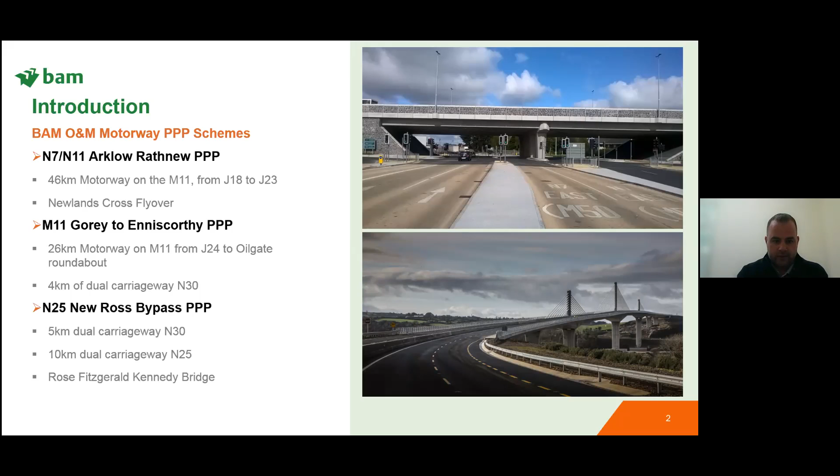In 2020 then we took over the operation and maintenance of the N25 New Ross bypass, which consists of 5 kilometres dual carriageway along the N30, 10 kilometres dual carriageway on the N25, and then in the southern half of that project, with the famous Rose Fitzgerald Kennedy Bridge.

So as I said, we start off with asset management - what that is. So what are assets on a motorway? Assets are every element of the scheme that make up the overall motorway, so that consists of your pavement, your fencing, structures, vehicle restraint systems, landscaping, drainage, road studs, etc.

It's our job to look after those, and we've got those contracts for 25 years.

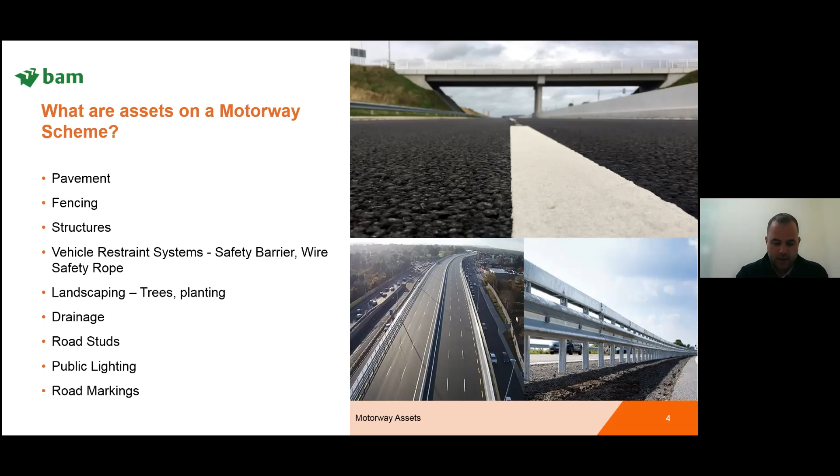And how we look after those systems is how they're managed - a routine maintenance management system, or RMMS for short. This is a system set up online that allows us to put up all the assets for all the schemes there, and they're all recorded. We then carry out our inspections on these assets right the way through, and we create defects on the assets.

As you can see in the photograph here, that's not how a safety barrier should look, so we've got a defect on the asset. And we start to create those, and there's a categorization for each defect. In the instance of this vehicle restraint system, that is an imminent risk to the road user. What you'll hear me use throughout the presentation is the safety of the road user - that's our number 1 priority. So all the assets are managed, looked after and inspected, and defects are created, all with the overall view of making sure that the safety of the road user is looked after at all times.

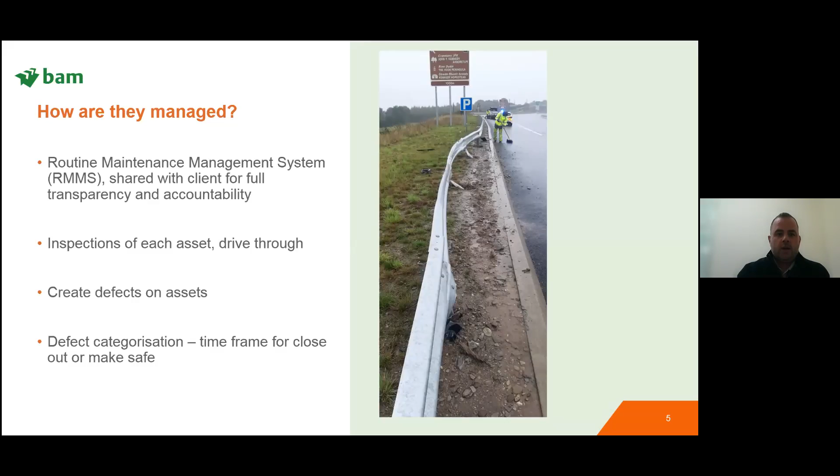So I said to talk about life cycle intervention. I put up there 'make it last', which was something I was told growing up constantly when I got something. So our aim is to make each asset reach its full potential of its design life, so make it last. And I've just written down some average design life for key assets that we found in our experience.

I want to make a point that I'm not contradicting manufacturers, productions or designers. In our experience so far to date of managing our schemes, we look at road signage - you get an average of 10 years before it starts to fade off, starts to reach the end of its design life. SMA pavement in our wearing course, we're looking at about 15 years, of course that's dependent on the environment that it finds itself in.

On the M11, which our works are on, we wouldn't have as high traffic volumes as we would have in the Dublin belt area, the M50 sections. Obviously, they would have to assess how long they get depending on the HGV movements and the traffic flows that they would have.

We've road studs then again, which are the new prism type road studs. You're looking at an average of 15 years before they start to reach the end of their design life. And then you've road markings, which we would look at about 6 years. All these assets are incredibly important to the safety of the road user at all times.

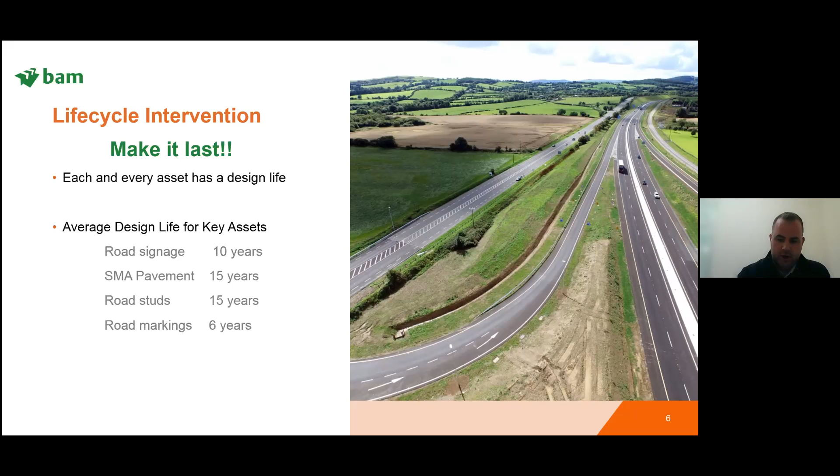PPP projects are programmed for interventions to ensure that we get to the end of the job. So as you can see here in the image, we want to be the pit crew team to keep that car racing all the way through till it gets to the end line. You certainly don't want to be the guys on the right-hand side trying to drag that car across the race line in poor condition.

So as part of that, proactive maintenance is the key. You don't want to be reacting to problems that you're finding out there. You want to be out there ahead of your problems and starting to get through.

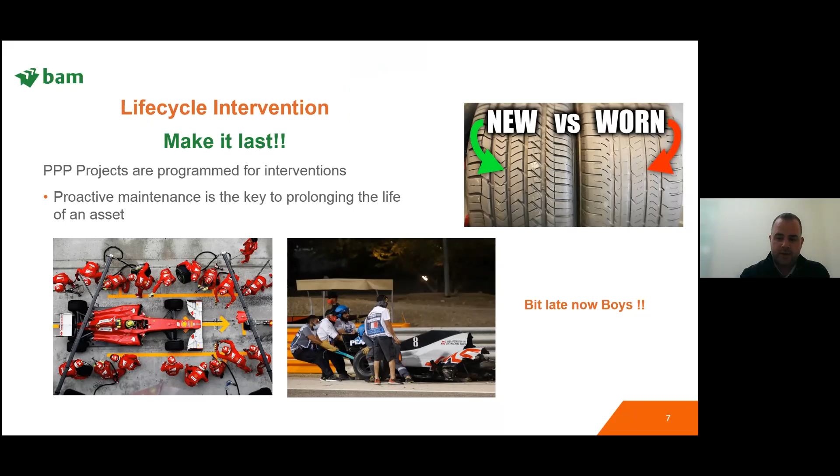So I've thrown up here something that's common to everybody, which is pavement, looking at scrim. Scrim is a very important part of the safety of the road user - it's your skid resistance. That's incredibly important when people are using it, they want to stop. Our skid resistance needs to be at a level that's safe for each road user to use it. As you can see in the graph in the top right-hand corner of the screen,

you start off on the left-hand side, you have excellent, good, fair, poor, and very poor over the timeline. And then you've got your failure from 0 to 100%. So over time, your pavement starts to drop off.

As you can see on the right-hand side, it's excellent, you're doing nothing - you're just carrying out cyclical maintenance. As it starts to drop off, you get into maintain, which is good to fair. As you can see on the table, you're looking at reactive maintenance, typically joint sealing, pothole repairs as such.

And then as it starts to get worse, you're looking at fair to poor rehabilitation. That can consist of, if your skid resistance is low, shot blasting to improve or extend the life, and delay the replacement works.

Also very important is any cracks along your pavement, along your road, need to be filled quite quickly so you don't have water ingress, which does become a problem during the winter months. And obviously at the very end, subject to other inspections apart from scrim, if it's getting very poor, you're starting into pavement reconstruction and your asset has reached the end of its design life.

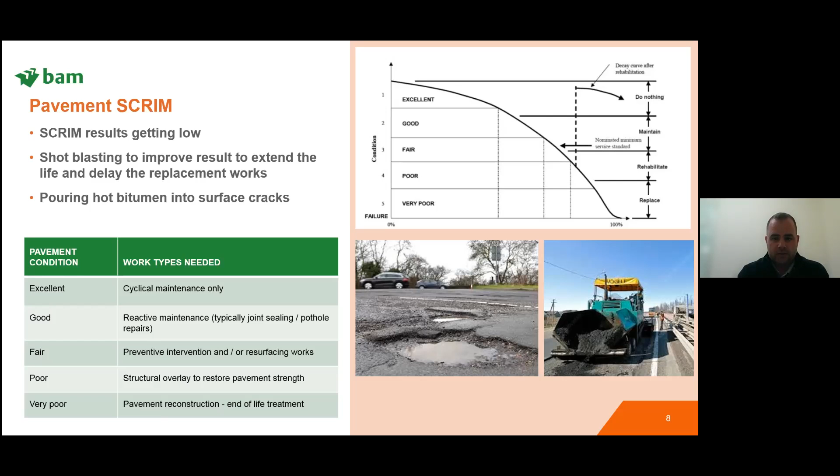So I've taken an extract of our contract for our skid and pavement testing. As you can see, if you can follow me best you can, you've got the lane survey method - we've taken an example here of scrim - and then you've got the survey category HD 28/04. You've got the survey frequency: lane 1 and slips are done every year, and lane 1 hard shoulder, lane 2 and 3 are done every second year.

And then you've got, as performance drops off, your investigatory levels. When it drops to a certain level, you're carrying out investigations to see is this going to cause a problem for the safety of the road user. And then you've got your minimum performance levels, and this is where you don't want to be, and if you are, then you've got to carry out intervention works.

And then at the end of our project, that's the 25 years, we have to hand back all our assets to a minimum performance level to the authority, so they take it on from here.

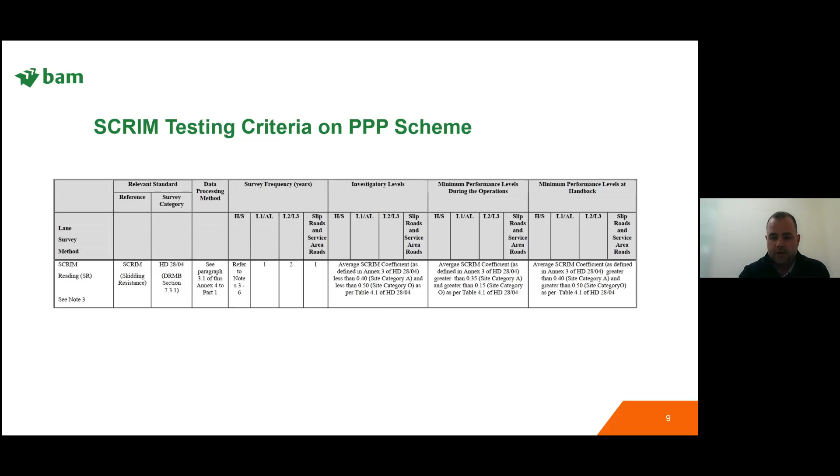I've just thrown in commercial aspects to say what goes on with these. You've got lane closures for these works, you've got the duration of those lane closures - all these items you have to carry out. You may see us out on the road and you're wondering why we're carrying out work at certain times.

For lane closures, you're looking at the surrounding environment, traffic flows, direction of traffic, and you've got to carry out your works where you're not having an impact on the road user. You've got duration of works, which again may affect your traffic flows of your client, the overall road users.

And then there's non-availability charges. As part of our PPP scheme projects, when we carry out lane closures, if lanes don't become available, there's charges to that. Each charge depends on the time of day and the duration, and if we don't follow those items, you've got penalties. As someone said, mind the pennies and the pounds look after themselves - but if you lose enough pounds, no one really cares about the pennies.

So to move on to emergency response, which is another element of the works we do. This image is usually when you see this, you're being diverted off or you're going to be delayed. Well, our guys are usually in the middle of this and we've got to get involved.

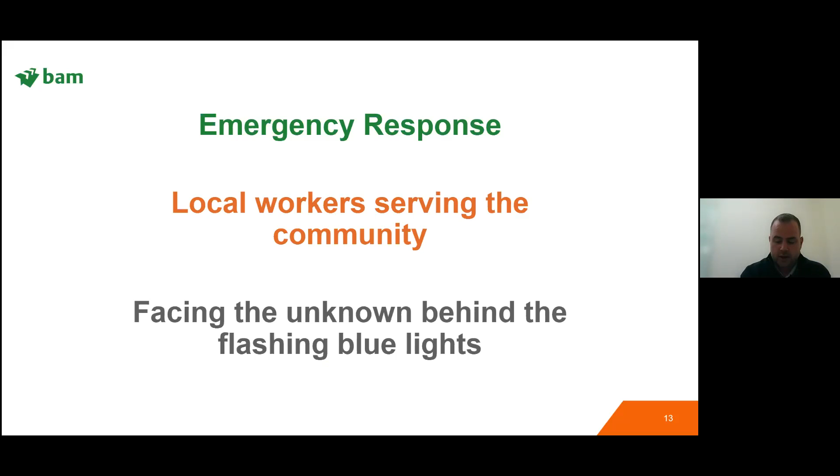All our staff are local workers serving the community, and the common theme for them at all times when they approach an incident like this is facing the unknown behind the flashing lights. Anybody can be in an incident - they can be family members of the people involved, and you never know how those things are going to work out for you.

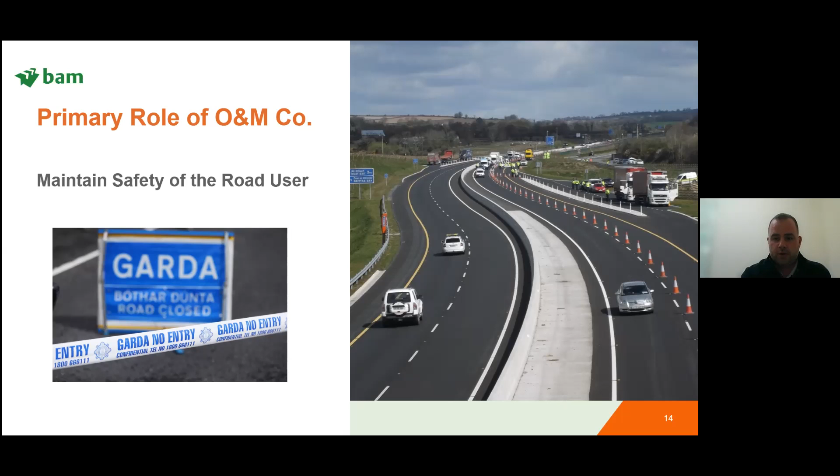So the primary role of the O&M Co is to maintain the safety of the road user, maintaining all those assets you can see in the image on the right-hand side, to make sure that when you're going on your journey to work, you can get there safely and not be worried about the state of the road.

As part of our works, we're constantly communicating with Gardaí, emergency services, fire services, etc. But we also deal with the Motorway Traffic Control Centre, or MTCC. They're a TII body - we're centralised, and we ring in and contact with them when we're going out to deal with an incident, whether that be a road traffic incident, clearing up debris, or dealing with whatever we find along the way. We're in constant contact with these guys at all times to inform them when we've got there and when we're finished.

And also it's a two-way street - they can ring us at any time, any day, and inform us of an incident and ask us to go out and have a look.

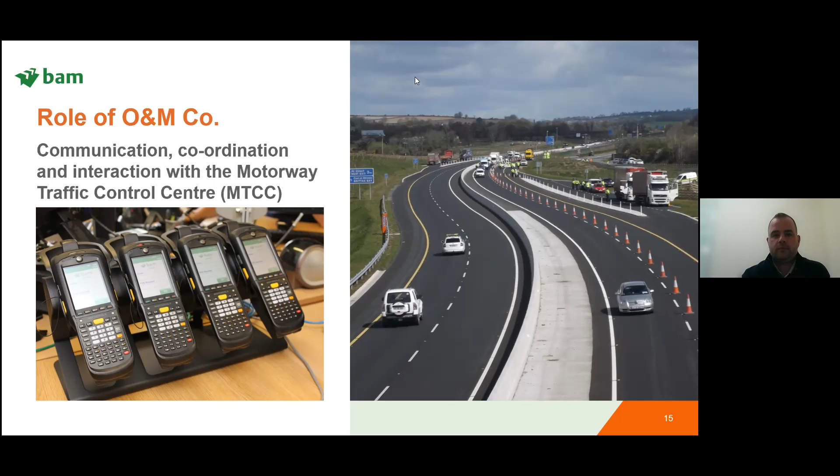We also can have instances of live animals on the road that we must deal with - that can be from pets to agricultural livestock. That's something you have to be constantly monitoring at all times. And then we have incidents of fire as well that we have to keep an eye on.

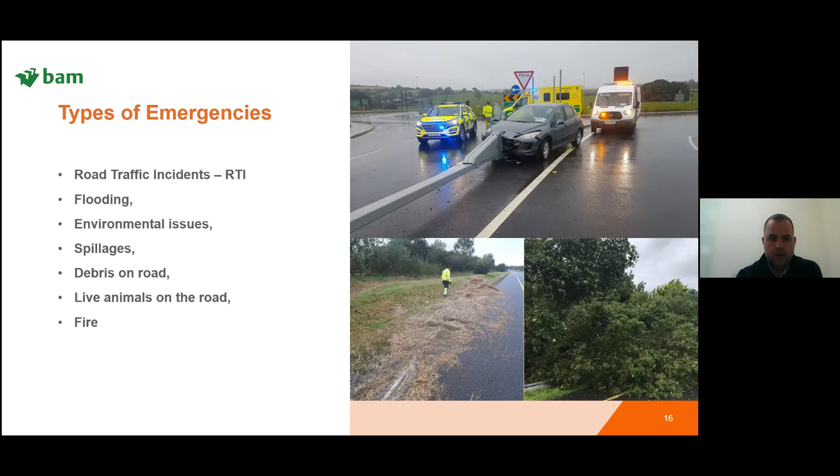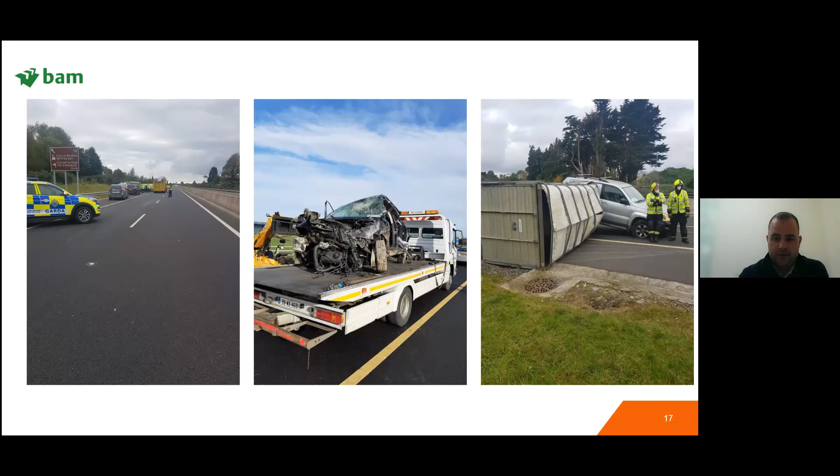So moving on to emergency response, we've obviously got time frames to deal with incidents. Each contract has its own individual hours. During peak times, 8am to 6pm Monday to Friday, we must get there within an hour, and we must assist and resolve the issue. Outside of those times, we have an hour and a half to get to incidents and help the emergency services as much as possible. As I said, we're dealing with An Garda Síochána, fire service and ambulance.

Again, road closures where necessary. I've written in here our number one rule for all our staff when they start with us: they must protect themselves before they help others. It would be very easy for us to run out with our Superman capes and try to help out in an incident, and find ourselves in bother also.

I've also written that although we're engineers and our job is to build a project, finish the project, maintain the project, and get it back on time in good condition to the client, there's a human element to our process where RTIs can be traumatic. You just don't know what incident you're going to find, and we don't know what incident our guys are going to find, while the Gardaí, fire services or other first responders are often the case where we're first on the scene.

So I just wanted to point out that we have a 24/7 confidential helpline for all our guys, an employee assistance program available at all times. It's a confidential system—they don't have to come to me as the operations and maintenance manager, and they don't have to come to their supervisor. This is a part of the job I didn't see when I came from a construction, civils and building background, that there's also potentially collateral damage from dealing with incidents like this.

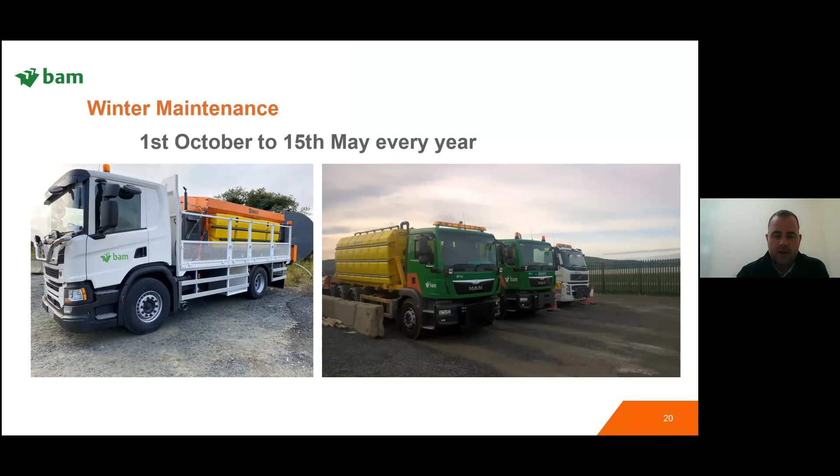Moving into winter maintenance, another element of what we do—winter maintenance runs from the 1st of October to the 15th of May every year. On the left and right-hand side photographs, we've shown images of the vehicles we use to deal with winter maintenance. On the left, that's a demountable pre-wet unit, which carries out pre-wet operations on the M11 and N25. On the right, you can see the trucks—those are brine fully wet systems that we use on the N7, N11 Arklow Rathnew scheme.

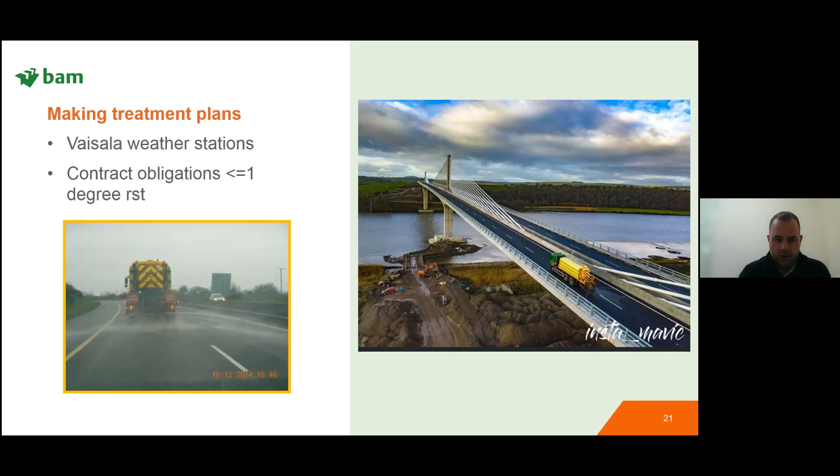As part of our contract obligations, we don't wait until it's going to freeze. If our road surface temperature shows it's going to get below or equal to 1 degree, we have to carry out interventions. So how do we go about shaping our treatment plans?

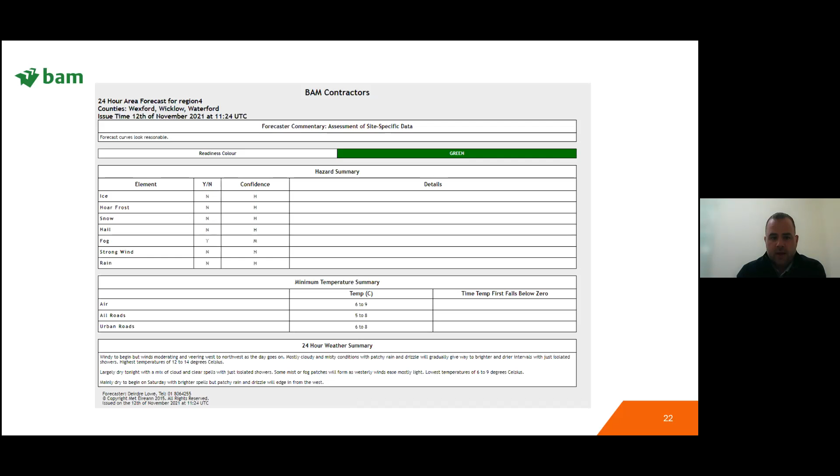What we're looking for is the road surface temperature and how low it's going to get. If that starts to move down towards 0 and gets below 1 degree, we're carrying out a treatment plan. We're also keeping an eye on the dew point temperature - if it rises above the road surface temperature, and the road surface temperature is below 1 degree, you're going to get moisture on the road, and it's very likely you'll get a frost.

Out of that, we produce our treatment plans - what we're going to do, what we're going to the road to do. Our number 1 aim in carrying out winter maintenance service is precautionary - that's anti-icing rather than de-icing. We want to get out and put a layer of treatment on the road and prevent the ice or frost from forming, rather than trying to react and remove it from the road.

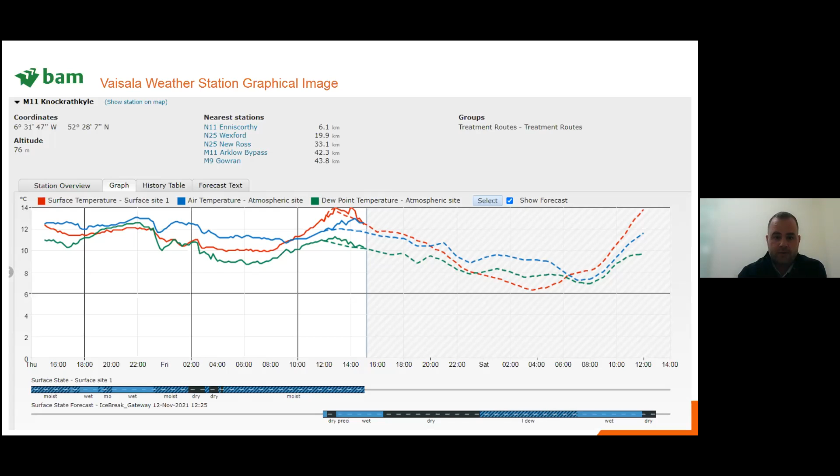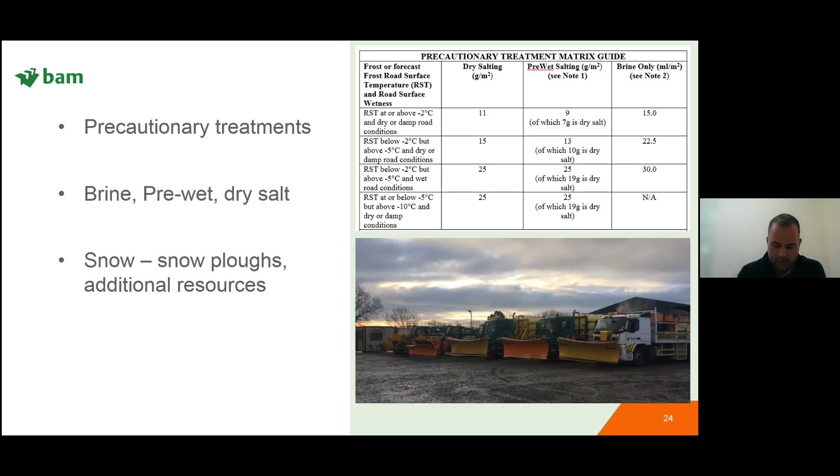On top of that, snow can happen. We have snow plows on our vehicles, and depending on how bad it is, we may need to call in additional resources. All this is wrapped up in our winter maintenance strategy, which is something we have to keep an eye on at all times.

For winter maintenance, we also consider risk to staff. At all times those guys are alone working out in their vehicles, but they're in constant communication with the other people out there. All our networks have 2 drivers, 2 trucks out every night, and they're in constant contact to let each other know they're okay. It's another element of the job I wasn't familiar with when I moved across, or wouldn't have been until time passed by, but it's something we have to think of.

And the reason I put in lessons learned - although we have our weather stations and our forecasts, as you move along the parts of the road, depending on the environment, you can have very different weather patterns. If you're in a cutting along a motorway, you'll be in a colder section of area because it's cooling down quicker there, it's more shaded.

You've got bridges, which can be at a height and exposed on all sides. This can cause problems because the road surface temperature drops far quicker there than in other parts of the network. Then you've got shaded areas, like along the Arklow bypass, where the vegetation and landscape are a lot more developed. This can cause frosts to hang around longer, or the road surface temperature to keep dropping even though the forecast shows it starting to rise due to the sun coming up or daytime temperatures. But if you're in a shaded area, it'll keep dropping and dropping. So we're constantly carrying out patrols to keep an eye on this.

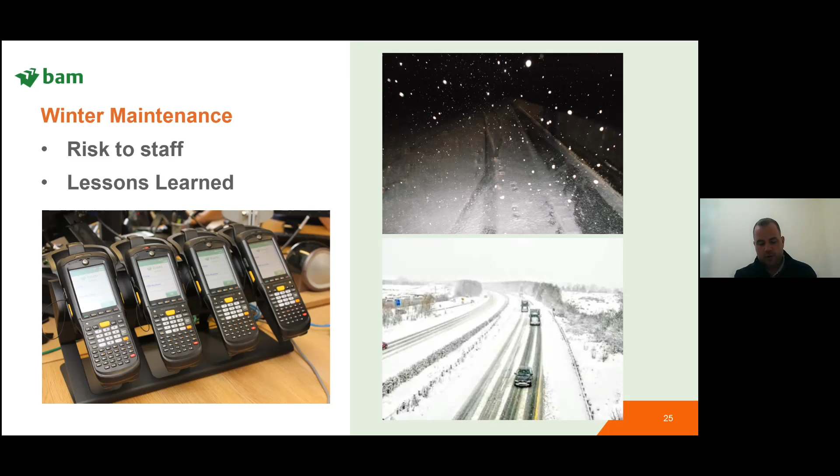So obviously you're starting to carry out a lot of ploughing, a lot of treatments, trying to get the roads back safe for everybody to use, and trying to maintain that. Because even though people were sent home, if emergency services need to move around, you've got hospitals along the eastern corridor from Wexford right up to Dublin that need to move around.

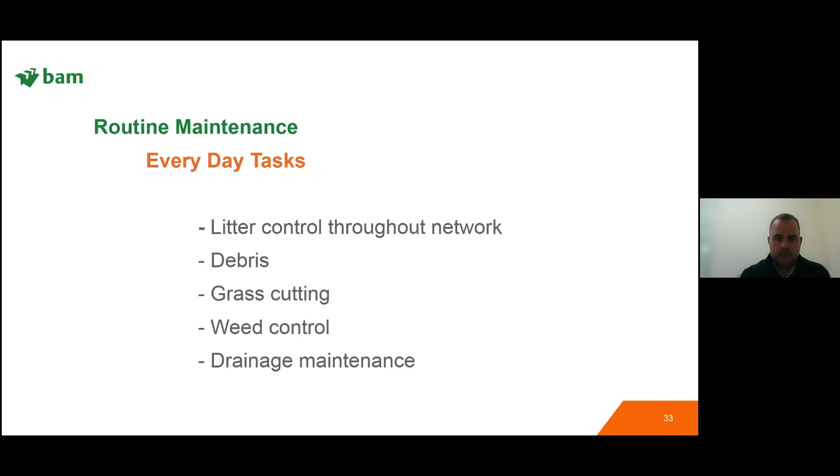So to carry out our routine maintenance, we have inspections on the PPP scheme that allow us to create defects and create jobs, and allow us to record them and make sure that they're raised and closed out.

So we have safety patrols that must be carried out minimum weekly. Every day we're out patrolling the road, but these are recorded inspections where you're basically raising defects on your assets as you find them. We have safety inspections, which are more detailed, a 2-person operation moving along, carried out every 2 weeks.

And then we've overseer inspections, which are to do with structures. So you're carrying out a drive-through of the network, looking at your structures, your parapets, your pavements, looking at all the elements you can see from the vehicle, on a weekly basis.

On top of the overseer inspection, some of you may not be familiar with this, but we also have the Eirspan system, which is a TII centralized bridge maintenance system that we must also feed into.

So we carry out annual routine inspections, usually put out-house to a professional service who carry out structural inspections, both on an annual basis for a routine inspection, and then we have principal inspections which are carried out on a maximum of every 6 years.

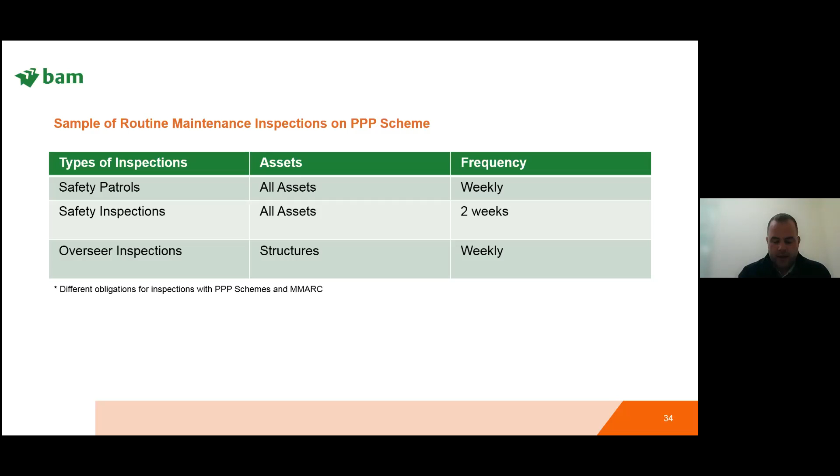So to move on, not getting too bogged down, for litter and debris control, I just put down the routine to the unexpected.

When our guys go out picking litter, one of the guys asked me the first day what you needed. I said, well, you need a litter picker and a load and shovel, because you can pick up sweet wrappers to caravans. This is hard to believe, but this is the kind of stuff we find left on the motorway. That's for us to clean up.

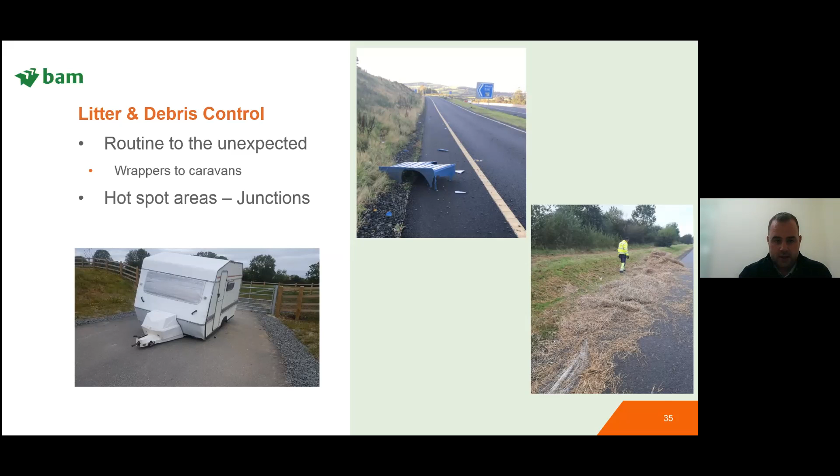I put in hotspot areas because something we've noticed over the last while is people coming onto the motorway, and the level of litter at the junctions where they come back from their shops and service stations - they see fit to throw it out along the motorway for us to tidy up.

I've also got removal of graffiti. Usually people like to spray up bridges. That's quite important for us to remove, because depending on what it is, graffiti can be offensive to people, and our clients - the PPP Co, and then the TII - take it very seriously. All forms of graffiti are removed quite quickly.

I wanted to put in removal of third-party signage. The reason I throw it up is because for anyone who may have put up sporting event signage, wishing their local soccer, rugby, or GAA team the best of luck, on a parapet of an overbridge or along the motorway, and then found it disappeared - it probably has disappeared because we've taken it, because we have to. We can't leave any signage that's not part of the motorway network up there, we must take it away. So if your local GAA, rugby or soccer teams are complaining about their lovely banner gone, give us a call, it's more than likely in our depot.

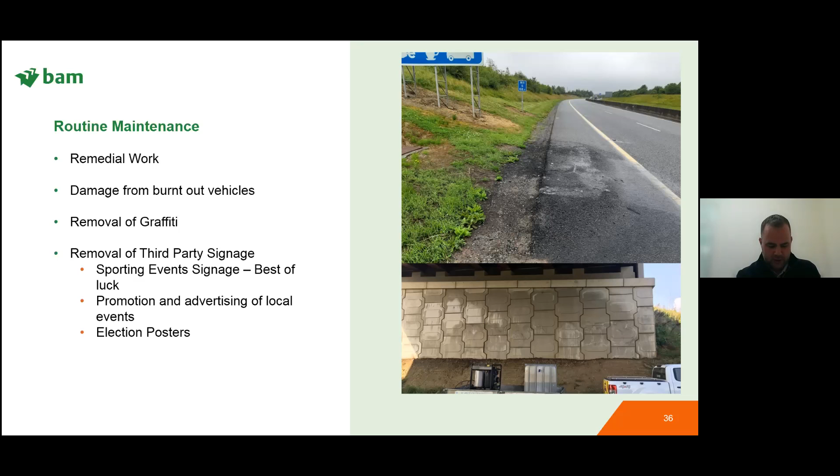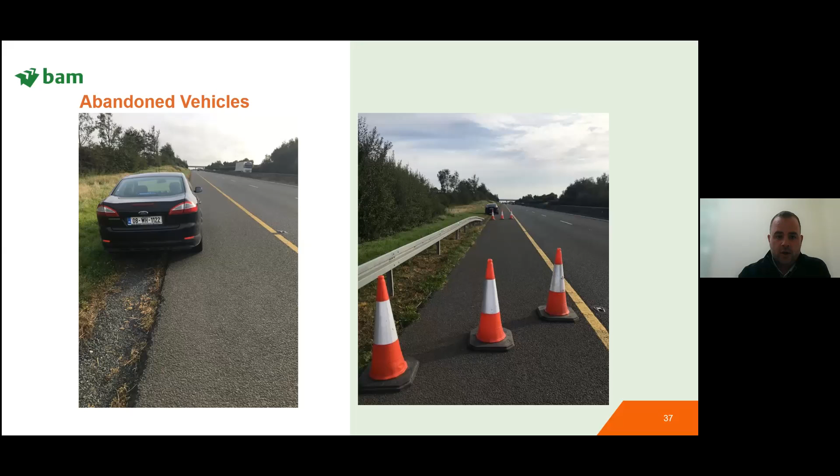Another one I wanted to point out is abandoned vehicles. This can happen along any section of motorway - people abandon their vehicles for whatever reason, whether breakdown or a stolen vehicle. These vehicles must be removed in coordination with the Gardaí. We cannot move a vehicle without the permission of the road user or the Gardaí in a situation like this. If it's in the live lane, we remove it immediately because it's an immediate danger to the road user. But otherwise we must get permission from the vehicle owner and the Gardaí.

So this is a high-risk activity, but it's something we manage every year, and thankfully we've had no incidents, but it's something we have to keep an eye on. With advance notice, we're letting people know where we can that there will be lane closures, so please expect those as they come along.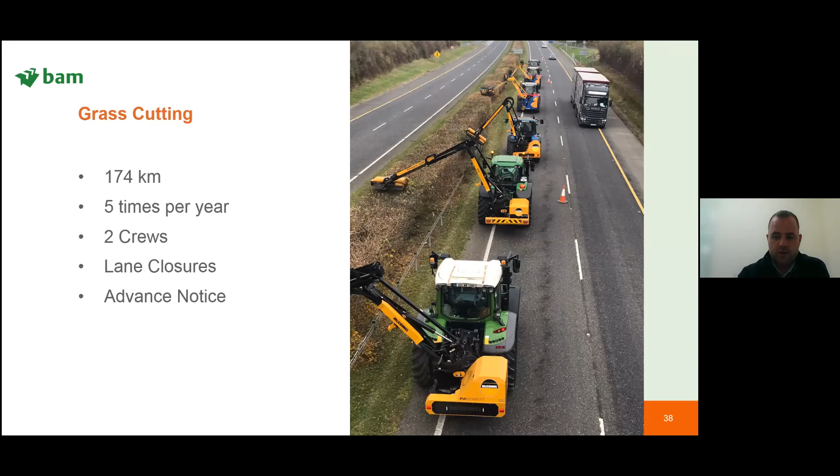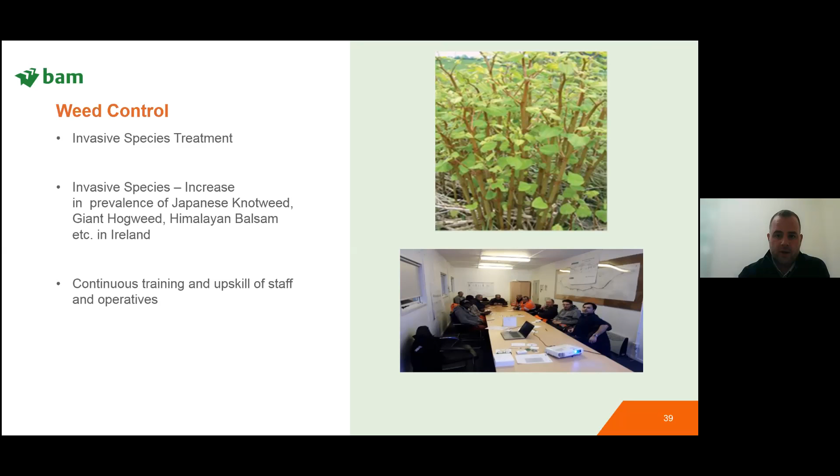Just quickly then on weed control, obviously we've got invasive species. I want to note that we've increased in prevalence of Japanese knotweed along the network. Thankfully, we have one location that we're getting on top of, but also there's giant hogweed, Himalayan balsam, etc. that we deal with in Ireland. Something out of that is the continuous training and upskilling of staff to deal with these occurrences, and how we get rid of them on an annual basis or as it may arise.

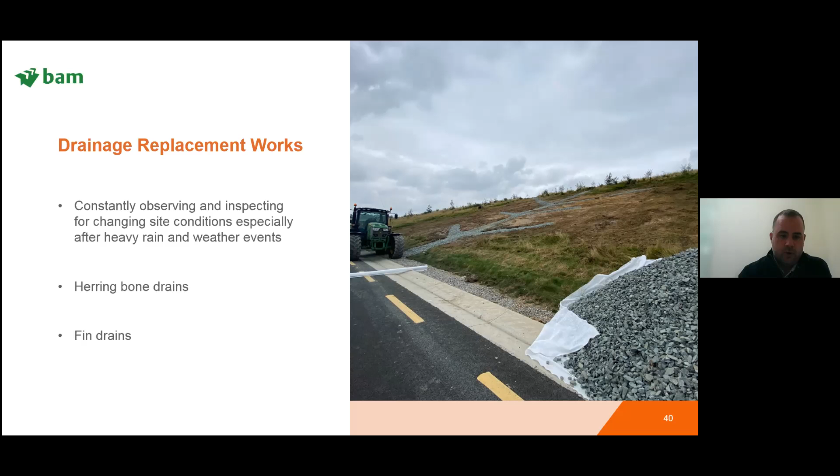Drainage replacement works - you're constantly observing and inspecting changing site conditions, especially after heavy rains and weather events. Here you can see a herringbone drain being installed. This is an incident where a spring that probably wasn't evident during construction started to pop up and was causing problems. We have to intervene to make sure we haven't got problems with our assets that are going to impair the safety of the road user. So in these instances, you're installing herringbone drains, fin drains, etc.

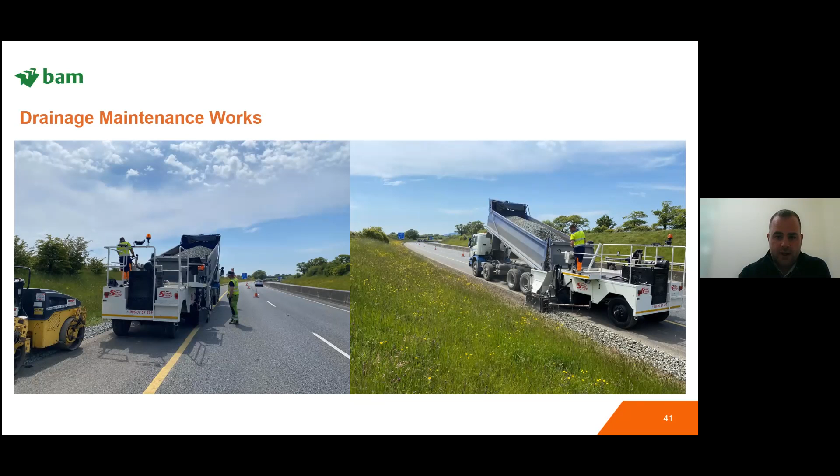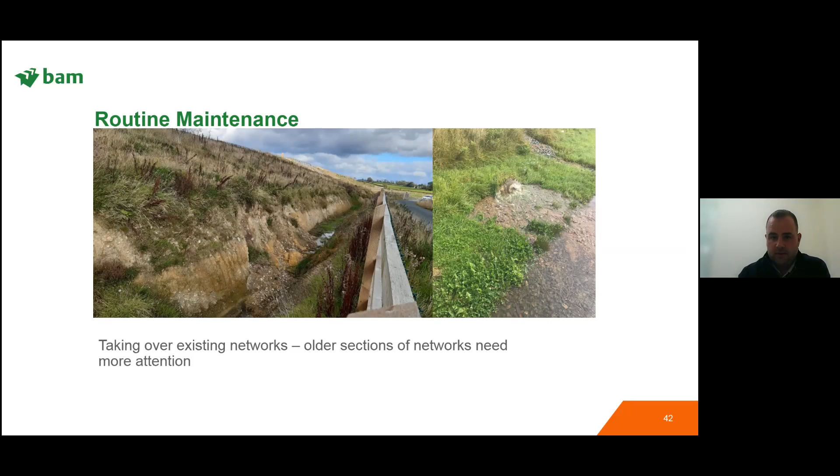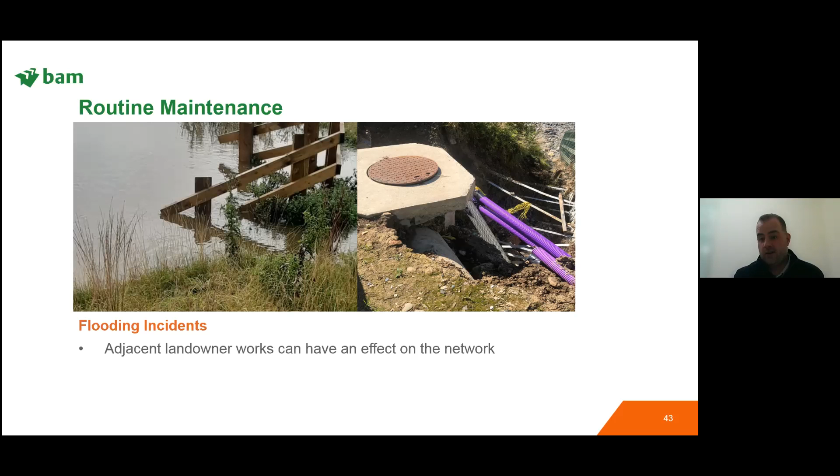So after heavy rain periods or adverse weather events, we've got to be out and inspect it. We've got to carry out remedial works before this becomes a serious problem that's detrimental to the structural integrity of the access structure.

We also have storm and weather damage that can happen. During the alerts we get from Met Éireann, we're out there dealing with any of those incidents, whether it be fallen trees, etc. We have to be out there 24/7, keeping an eye on those things.

Before I finish - after all of the above, when we think we've got it all covered through our inspections, asset management and life cycle intervention, someone comes along and robs our fencing around our attenuation pond. You can't allow for that, I'm afraid. It's something we've noticed over the last while - as the price of waste metal increases, we've got interested parties in our metal assets, such as gates and fencing along the road.